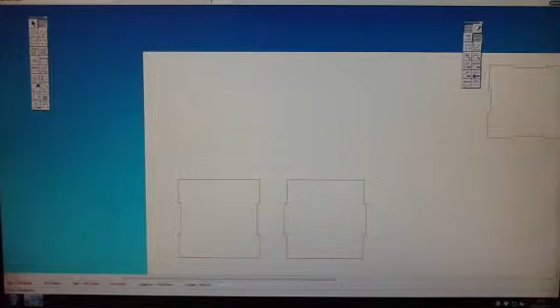In the second part of this video, we're going to look at drawing the lid and the base of our finger jointed box. Now there are various different ways to do this. The easiest way I have found is to almost treat the drawing as an orthographic projection.

And to that end, what I'm going to do is I'm going to click on lines and I'm going to move across, click on my attract, and as we did before, I'm going to draw some lines from the endpoints up here to the top of the page.

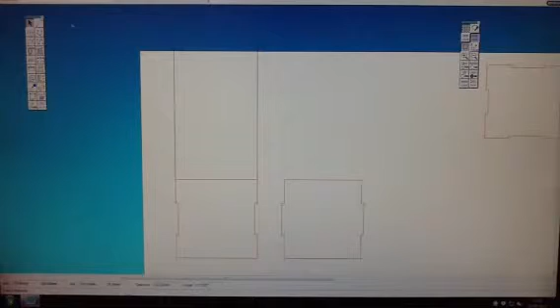I'm also going to go to the inner part of my internal finger and I'm going to draw a line to the top. One thing you do want to be aware of, as I just demonstrated there, is that if you do get too close to another line with your attract on, it will join together. So I'm just going to draw these lines slightly higher to avoid any stray lines.

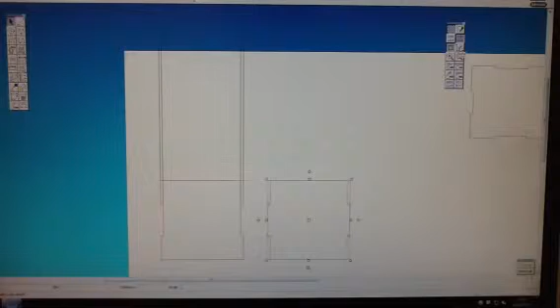What I need to do now is turn the right hand box onto its side. And the way I'm going to do this is I'm going to drag a box to highlight that and I'm going to rotate it, but I want to do it with the radial lock on. So if I go to my Draw Edit toolbar, click on radial lock, I should be able to rotate that box first 45 degrees, then 90 degrees.

Now it's a good idea to remember to take your radial lock off, otherwise your box will only be able to move around the page along the 45 degree or 90 degree mark. What I need to do now, click on grid lock, and I'm going to move my box up here. Once I'm happy with that position, take grid lock off and repeat the process as with the first box.

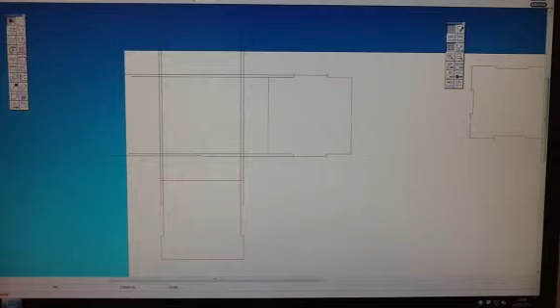The final thing that we're going to do here, as we have done with the other fingers, is I am going to put some construction points along my box. And what I'm going to do here, distance of 30 again, I'm going to go click on that line there, click on the left hand side,

and then click back on my line and take my construction line up to the top of the page here and up to the top of the page. I could also at this point do the same down here. Next thing I'm going to do is draw some construction points again, 30 here and 30 there. For the sake of argument, let's just put ours here.

Then take our lines again, make sure that they are absolutely horizontal. It's a good idea to try and get them spot on because it causes less problems later on. Okay. That should be the outline of the box, which should be ready for all the extra lines to be moved out the way.